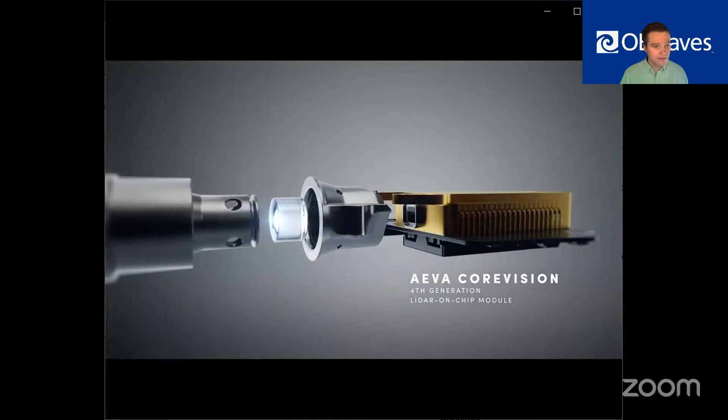For 90 minutes, we explore the current business opportunities in LiDAR, as this is now one of the most unpredictable markets. I believe the biggest decision regarding 3D sensing in robotics and automotive is whether to say yes or no to LiDAR. Tesla said no three years ago, believing 2D cameras can do the job for automotive. However, for Elon Musk, SpaceX is different.

SpaceX Dragon uses LiDAR to navigate to the space station and dock. Not only that, SpaceX developed its own LiDAR from scratch to do that, and I spearheaded that effort personally. Because in that scenario, LiDAR makes sense, and in cars, it's stupid. It's expensive and unnecessary, and as Andre was saying, once you solve vision, it's worthless.

Other companies like Continental in automotive or John Deere in heavy machinery have invested deeply. Today we are testing our HRL131 long-range LiDAR, which we developed together with our partner AEye. This LiDAR is developed to detect, for example, lost cargo, like a tire that lies on the highway. So what optics and photonics do those Continentals and John Deeres of the world need?

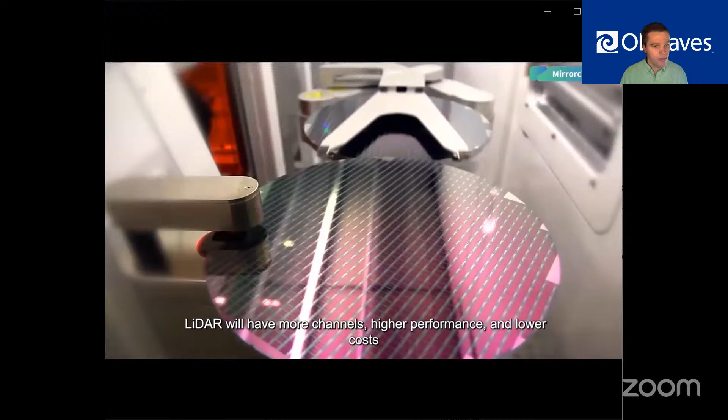Investors are clearly confident that the LiDAR market is expected to grow to $2.3 billion by 2026. Despite some uncertainties, I think we should be optimistic. There's increasing adoption in domestic equipment, autonomous vehicles, particularly in Asia, along with applications in aerial mapping, defense, infrastructure monitoring, robotic vision, and environmental monitoring.

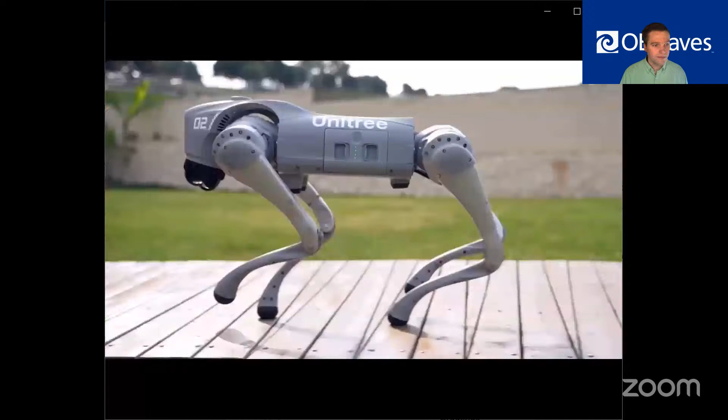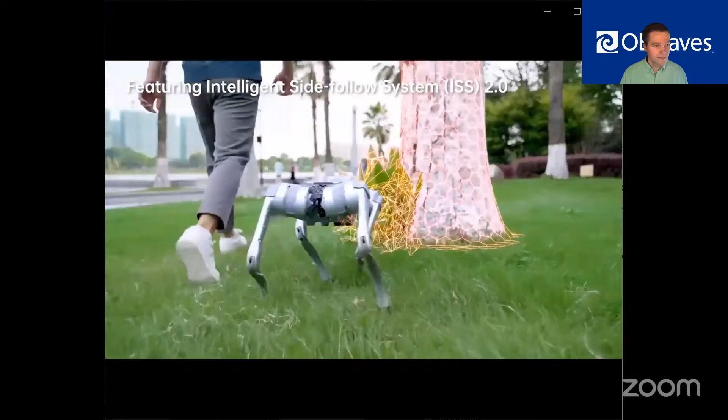And the biggest trend in LiDAR is the incorporation of AI, providing the system with an AI-educated guess, allowing it to react appropriately depending on what the object is. Our online meeting will showcase real-world end-user cases, with contributions from Continental, Robotics, John Deere, Lumotive, Optica, Scramblux, and many more.

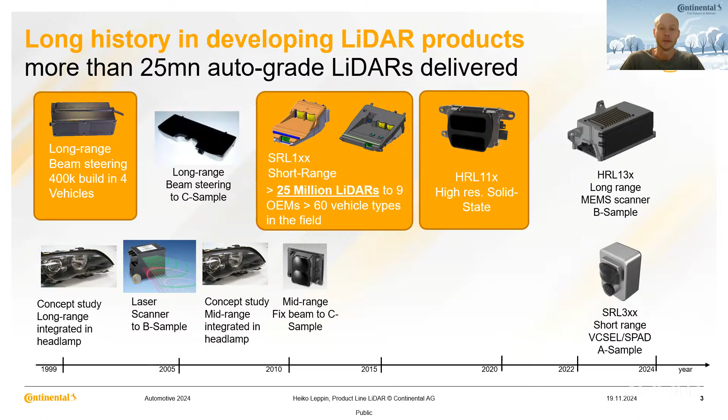I would like to introduce you to the most recent developments we've done in this area. This again emphasizes Jose's words on the diversity of the market, and really, it is diverse.

We have developed a mid-range product with a 120-degree field of view, which is a full frame flash - it captures the whole image at once, so there's no motion blur and every pixel is timed equally. That can be very interesting for high-speed situations, when a car is quickly moving in a roundabout or in a very dense and complicated situation like a parking lot. It uses a DPSS solid state laser, so it's a very unusual type of LiDAR, and it uses an InGaAs detector array.

And then there's a long-range product which we developed with a very configurable field of view, which is changeable in situ or online, so it could act as a long-range narrow field or a mid-range wide field of view sensor. It uses MEMS scanners, 2D MEMS scanners, a 1550 nanometer fiber laser - again a very different laser technology - and a 2D InGaAs detector array, kind of similar to the one we've seen in the first product.

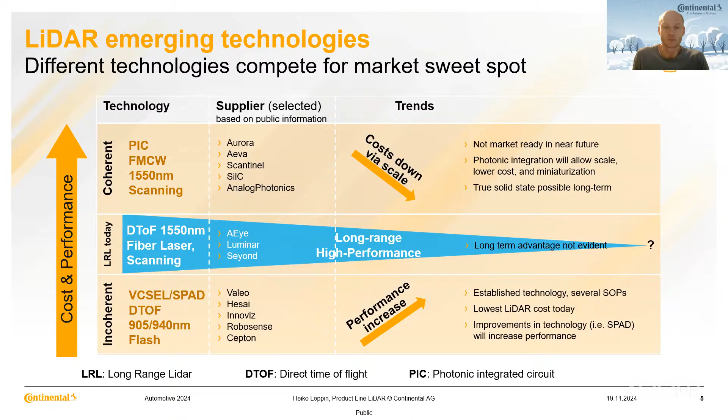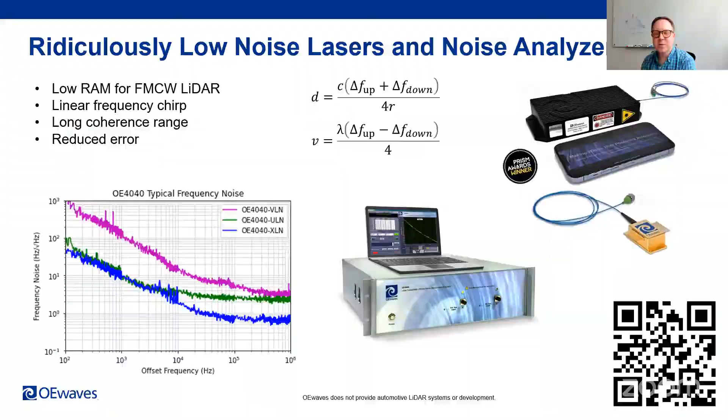Thank you. Any comments? Matt, I know you're working on 1550 — does it look interesting to you? I think we're sticking with pulses for now, but that looks like a really nice laser output. Very good. If you ever run into noise being an issue, you should try one of our lasers and at least see if the laser is the source. Yeah, there's definitely, in the wrong LiDAR architecture, noise is a problem. Agreed. Well, I'll make sure you two are in touch after the meeting — I think there might be room for a conversation there.

Meanwhile, I'd like to introduce our next main speaker, for whom precision is of high importance. Ori, this is something you potentially should work with too, because precision becomes very critical when we speak of very low or short distances — that's where we speak about vision. With this, I'd like to switch to our next end user and system integrator presentation, Anand Gopalan from Vayu Robotics. Anand, tell us, is it a go or no go, or maybe, for the LiDAR for vision? The floor and the attention is all yours.

Thank you, and good afternoon, good morning everyone. Thank you for inviting me to the presentation. Let me first pull up my slides and make sure you can see them. Are you able to see my slides? Perfect, great. So I'm going to spend a few minutes on this slightly provocative headline: is LiDAR even needed for robotics?

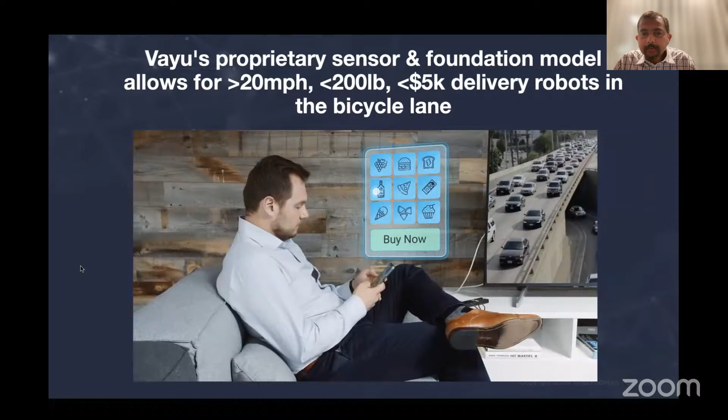So you will see here in this video effectively a grocery delivery application where a customer goes and orders groceries. The robot runs a modern AI stack, so it can essentially follow the picker inside the grocery store.

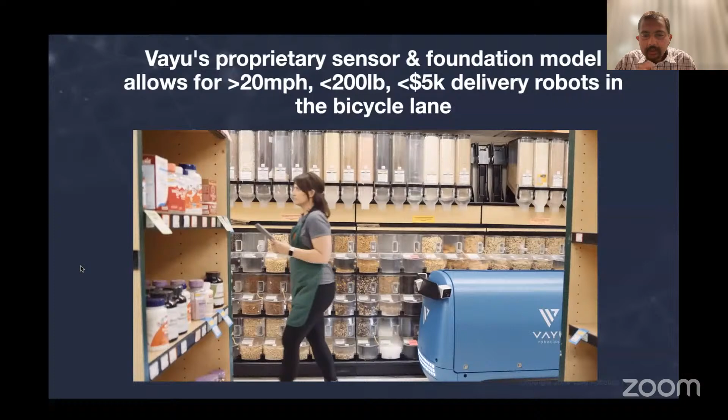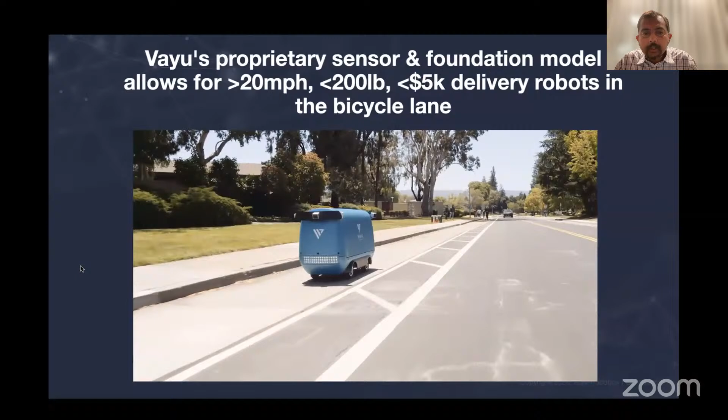And you can see a sensor package on that robot that does not include LiDAR. So this is, let's call it, a Vision Plus robotic system, capable of functioning in daytime, nighttime, and a variety of different weather conditions, and able to do fairly precise lateral localization without using LiDAR, and then delivers goods and moves on.

This is now currently functional and we are doing real-world deliveries in a couple of cities in North America. So this is kind of what is possible, and this is what we have built as our first product.

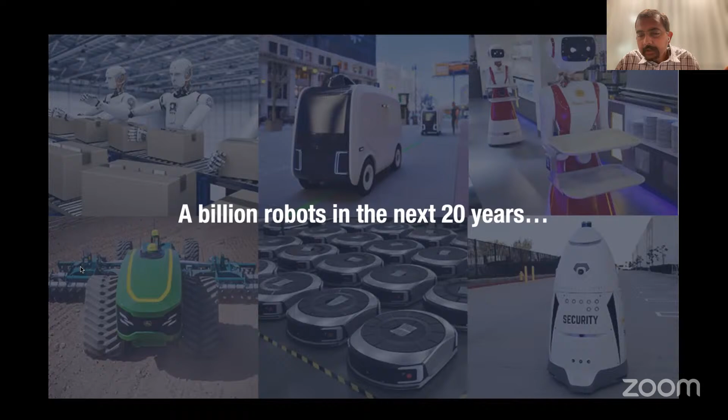If you take a step back and think about the world today, we are obviously at a very interesting point in the world of robotics. There's people like Elon and Vinod Khosla who have said there's going to be 1 billion robots in the next 20 years. I don't know if this is true, but certainly we are seeing a lot of robots out there, and the number of robotic systems is growing across a variety of different form factors and applications, whether it's humanoids, tractors, warehouse robots, and so on and so forth.

And all these robots need eyes. So clearly, sensing continues to be a very, very important problem to be solved for robotics. But the requirements for sensing in robotics have changed and evolved a lot, even in the last 5 years.

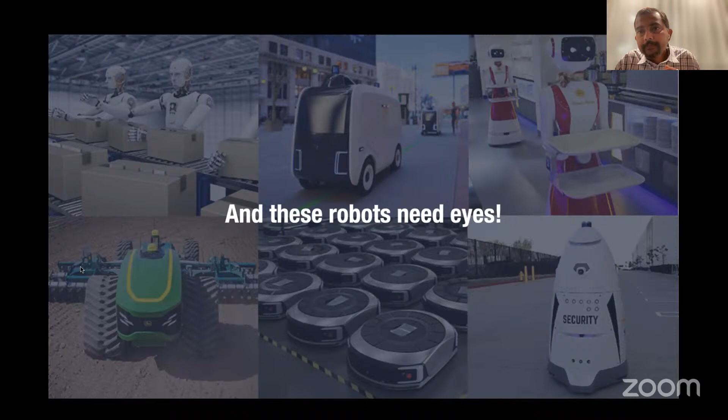You have object detection, segmentation, localization, all these software modules that do these different tasks. Then you track dynamic objects, then you do prediction, behavior planning, and then you essentially provide a control output to a robot. This is how robotics software has been built for the past 20, 25, 30 years.

This works very well. There's a lot of companies and a lot of successful businesses around this, but there's always been a fundamental challenge that we have all grappled with: the hardware is always inevitably too expensive, and the software is inevitably very brittle, which means you have to write bespoke software for every single application, and the hardware set is always an order of magnitude more than you wish it would be. That has been the trend for robotics for a very long time, until the last 5 years.

And I think you are now firmly in this world of robotics 2.0, where you have gone from this series of software modules that do all these different functions into a single AI model.

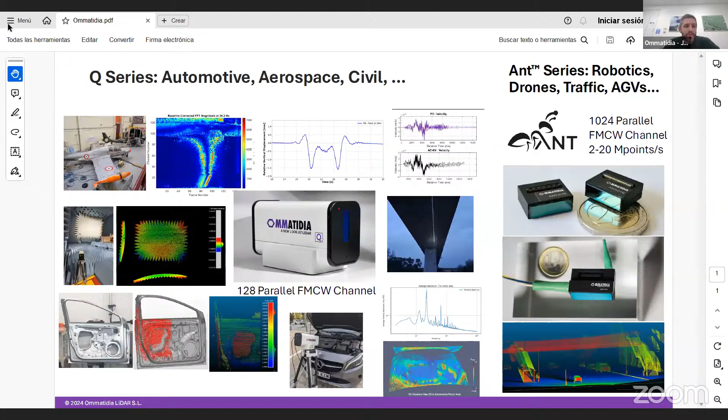Systems. Yeah, thanks a lot for the introduction, Olga. Let me share my slide. So, yeah, my name is José Luis Rubio. I am a VP and one of the founders of Ommatidia. And what we do at Ommatidia, we develop FMCW LiDAR systems and sensors.

What's different about us is that we do this in a massively parallel way. What you see here on the left is our first line of products, called the Q series. We developed the Q1 a few years ago, and this here is the Q2, which we presented last week. These systems are intended for high precision metrology of large structures, more for industrial applications. You can see the size is not really something you would still like to put on your robot.

Since we do FMCW LiDAR, we can measure both distance and speed within the field. This high precision metrology gives information about the vibration of structures, so we are using this mainly for applications in aerospace. This here on the left is a very large reflector, 14 meters wide. The accuracy we can get here is really high, in the range of 0.1, 0.2 millimeters at these long distances.

We also have applications in manufacturing, like car part manufacturing, here on the bottom. That's for the metrology part, the shape of the construction part. And for the vibration, we are also seeing many uses in dynamic analysis of structures.

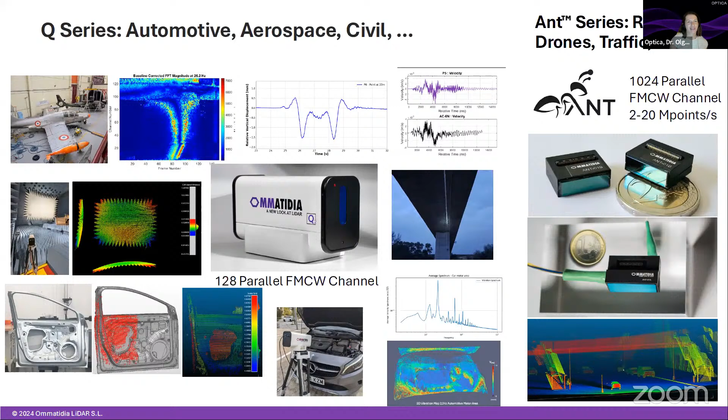Yeah, so it's really a thought from the approach of just throwing everything into one of these big end-to-end models. At the end of the day, they're making good progress, but there will always be some long tail of literally random probabilistic hallucinations. So, for example, Wayve and some others looking at similar approaches explicitly say we want to have a totally non-AI pipeline, which kind of has to be LiDAR to be reliable, that says you can drive here, you can't drive there. If your AI system proposes you swerve out of the lane into something and there's nothing there, don't do it. These kinds of things.

So I was just curious, it sounded like your approach is to continue to put everything into the foundational model and hope that it just pushes those hallucinations to a small enough number that it's palatable.

No, I think you do need a parallel safety system that's not end-to-end based, because there is always a probability of a hallucination no matter what you do. So that's what I meant when I said there is a safety guardrail. In our robots also, we have a safety system that is purely physics-based.

But even there, we have to be careful when we say LiDAR is the only solution, because you can have stereo camera-based depth, right? That can work very well if you can do away with all of the inadequacies of a stereo camera, which is sparse features, basically stereo depth fails, and low light stereo depth fails, and so on. So what we have done with our light field or panoptic sensing approach is to do away with some of those inadequacies of traditional stereo cameras. So we can create a depth pipeline that is purely non-ML based. It's semi-global matching based, but far more robust than you would get with a traditional camera.

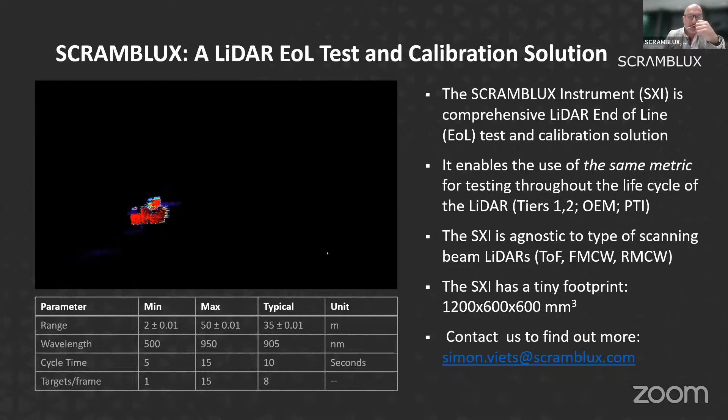And that's how we qualify the LiDAR. Essentially, we have those metrics from our instrument. We put your LiDARs in. We use very simple AI in this case, where we use a classifier to just identify our target. And from this, we can just tell you pass or fail, depending on how it goes.

Lots of words, completely different topic, as I said. Very open to questions. Thank you.

I think the question with testing systems like this has always been the ability to test for range without effectively losing the light along the way, right? So how do you deal with range testing, and how do you deal with that without effectively having uncalibrated losses in the testing system itself?

So the key, good question, actually. It's good, you can see the principle, I understand. So first of all, we use retroreflectors. We don't use Lambertian targets. And we have derived an analytical model for calibrating the retroreflector to Lambertian in free space. That allows us then to do these kind of calibrations in this environment. And I think you understand how the unit cell is working. That's one of the keys that we have.

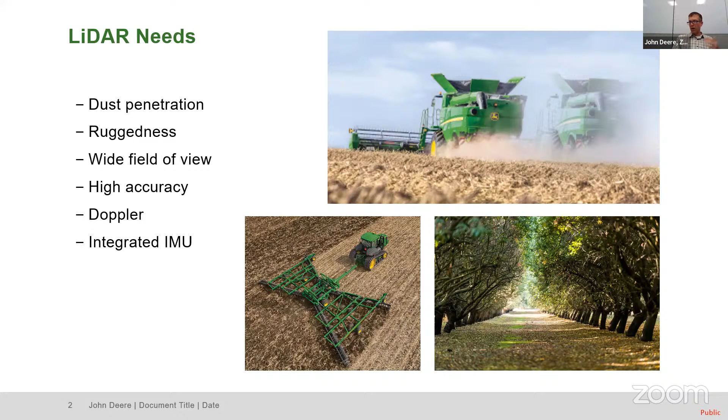Going back to dust penetration, we've actually done quite a bit of testing of different sensors and done some elaborate tests to look at how well different sensors can penetrate dust. And right now we even have - this dust chamber in Fargo, North Dakota is nearly commissioned now.

So if you have a device that you think would benefit from some dust chamber testing, maybe we can talk and get you into that facility in North Dakota. Interestingly enough, there's not too many people demanding to use the chamber in January in Fargo, North Dakota. So if you're interested in going to Fargo in January, I bet we can squeeze you in.

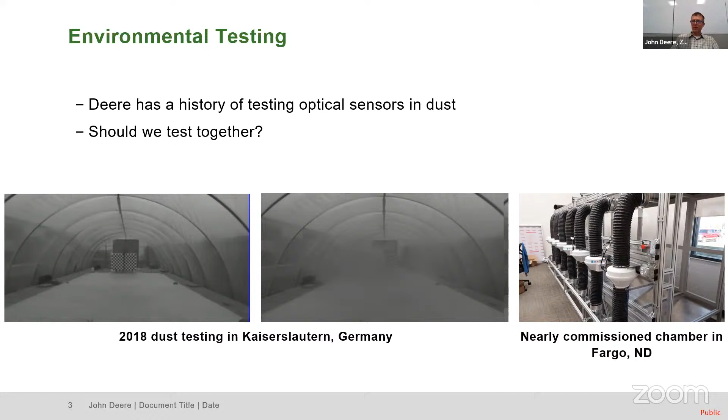Anyway, that was my last slide.

Thank you, Zach. I think Merva is already laughing about the January comment.

When you speak about the basic parameters, range and field of view, what would you say is sufficient for your applications? What are you looking at? Is it the same as automotive, beyond 200 meters? What are the angles? Do you want to see 120 degrees to check if a tire flies somewhere? Or is it just that it's unbreakable?

Certainly we don't have the same range requirements as automotive. There are scenarios where we want to see out to 100 meters, but I would say the vast majority of the time our sensing is within 50 meters.

We have a very funny question from Heiko. Heiko, please unmute yourself and ask.

Zach, I was very interested about your dust test chamber, not so much about the comment about testing in January in North Dakota. We see a lot of different dust particle sizes, right? And also different LiDAR systems would be affected by different particle sizes - 1550 nanometer versus 905 nanometer. The backscattering would be very different with the same sort of particle sizes. So what's the range of particles you are testing in this facility?

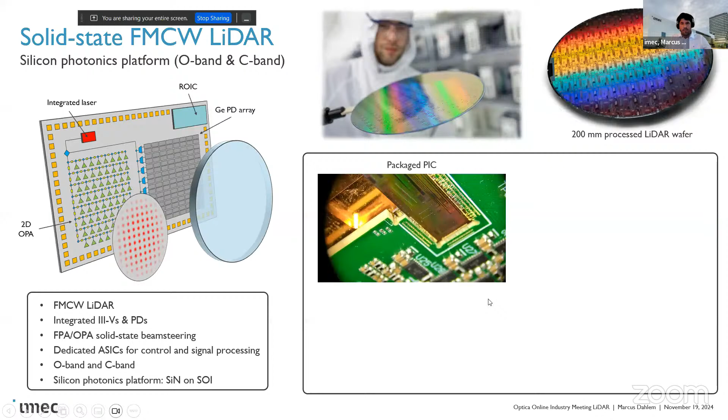The photonic chip is a slightly different architecture from the one you see here on the left side, but we have done so in order to demonstrate. We've also put together all these components, the PCBs with the photonic chip, all the dedicated electronics, in a custom housing, also a small lens there, and this lens is for the imaging part.

With this, still in the lab, we have obtained our first point clouds that you can see here. Again, very, very early results that I wanted to share with you guys, that we have just obtained in the last month and a half. And that's what I wanted to share with you. I'm open for questions. Thank you.

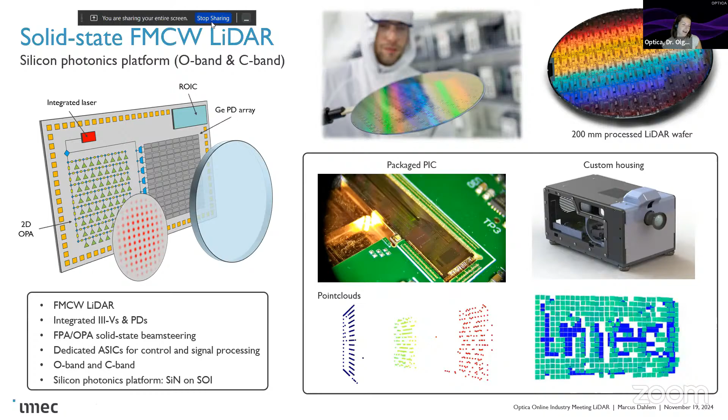Thank you, Marcus. So how about the challenge from Zach? 1550, extremely robust FMCW. What do you say? I already challenged Ommatidia. How about you? What would you say? You're exactly the imec. So that's a good question.

So indeed, what I showed you here is done at 1550 nanometers. We are working at these longer wavelengths. It was just mentioned by John Deere that typically longer wavelengths tend to penetrate better through fog and particles. There's obviously a limit that was also mentioned, but we have been working on 1550 and at 1310, that's the O band. We are exploring these longer wavelengths.

Now, what you saw there, and what I showed you first, is the first prototype, which I would classify as a short range LiDAR, talking about maybe a few tens of meters in range. Next iteration will be what I call a mid-range LiDAR, up to 100 meters, still in these wavelengths I mentioned, O band, C band. And then finally, the long range, as Heiko had classified it before, up to 250, 300 meters.

So we believe that working on silicon photonics is really a way to reduce the price, increase the volume, and also increase the robustness of these systems, assuming that you put everything integrated in a solid state way. That's exactly what we are trying to do at IMEC. Again, we're not in the business of building a LiDAR per se, but rather developing the technology to collaborate with partners, and some of them are in this meeting actually.

So are you optimistic on going in January to North Dakota? We could go maybe in the summer.